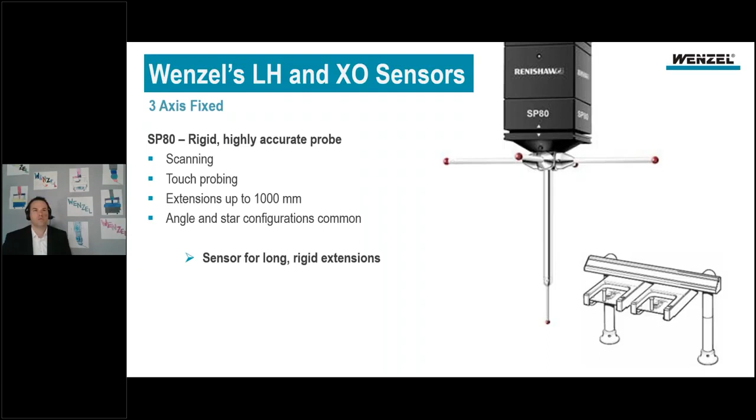So moving from a 3-axis fixed, we'll move into a 3-axis articulated probe. Articulation means we're still using the 3-axis of the machine to do the measurement. However, with a 3-axis articulated probe, you can now move the probe into different angles and positions. This eliminates the need for complicated configurations like star probes, crank probes, and allows more flexibility for the programmer to choose the angles they need.

This 3-axis articulated probe comes in two flavors, the PH10T and the PH10M. The PH10T is the most basic. It's for touch only, and you need to use manual threaded-in extensions. Where this would be appropriate is in an environment where you have very little changeover in parts, where maybe the parts are very simple, or where cost is of utmost importance for the customer.

Moving to the PH10M, M stands for multi-wire. This is essentially the most ubiquitous probe in the world. It allows you to use touch probes, physical scanning probes, and offers a wide range of compatibility with optical and laser sensors. Because the PH10M is truly ubiquitous, and it is in almost every manufacturing shop in the globe, if you're a third-party manufacturer, you develop your sensor to fit on a PH10M. It could be a Nikon, it could be a Kreon, it could be something else out there. Anything in the world, you're going to design it to probably be compatible with a PH10M. That gives you a lot of flexibility as a customer.

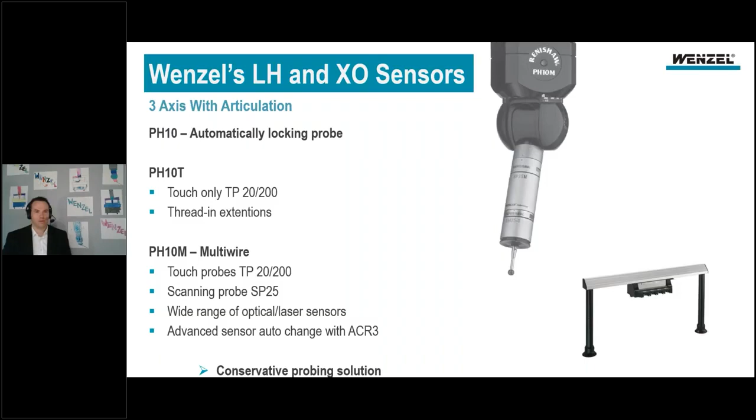So moving from our 3-axis, as we continue to get more and more flexible, now we're going to move into 5-axis touch probe. Where 3-axis was the machine doing the measurement, now we're using the machine and the probe together to do the measurement, which is 5-axis, two on the head and three in the machine. This is the PH20 touch system. This allows the machine and the probe to work together to take measurements in a very high-speed fashion.

I can talk a lot about this, but it's kind of hard to describe how quick and how much 5-axis changes this situation. So I'm going to play a quick video for you.

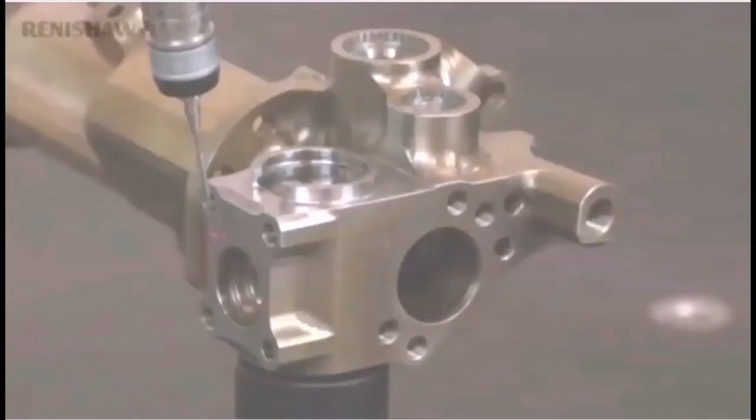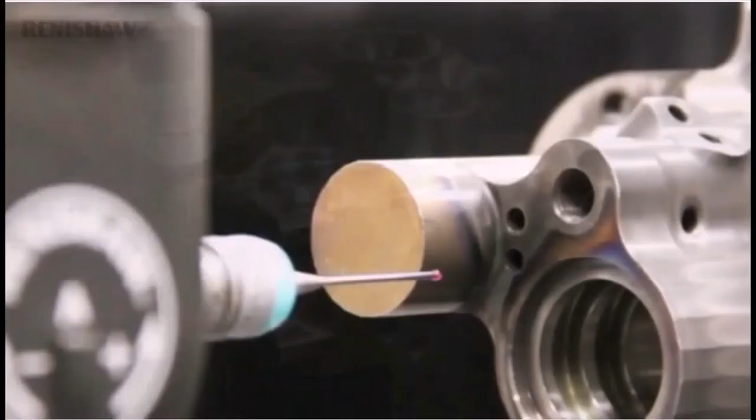As you can see, the probe head is positioned by the CMM and then it's taking measurements on its own. It truly is an incredibly fast solution.

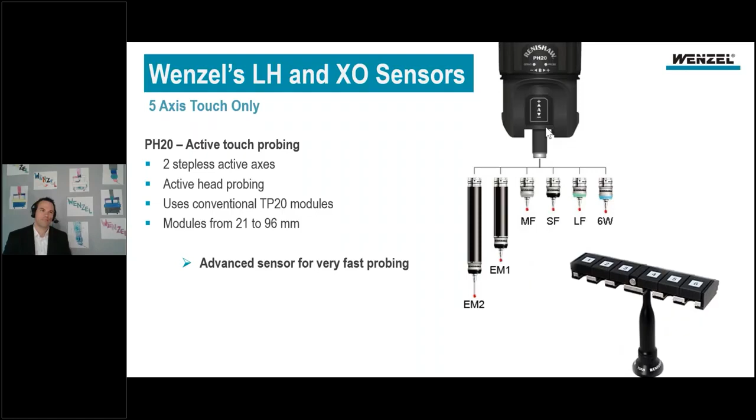So if we take all of these probing technologies and combine them together, that's where we're going to lean into the REVO system. The REVO system is a truly revolutionary sensor system that our CMMs are built and designed to carry. It not only has long styli, it not only has multi-sensor, but it's also 5-axis movement. It's also 20 times faster than a traditional CMM.

Traditional CMMs of whatever brand use a scanning probe that has a maximum scanning rate of about 25 millimeters a second. The Renishaw REVO can scan 500 millimeters a second. Now, I've talked to application engineers, I've talked to competitors, I've talked to customers. This isn't just a marketing blurb. It truly does run at that speed, and some people say it's even better when it's running faster.

Now, the REVO is the most expensive solution I've provided to you so far. However, it's completely revolutionary, and it changes the way we have to think about CMM measurement. With it being a multi-sensor technology, you not only have the incredible high-speed scanning, and high-speed movement for touch.

But now you can add a surface roughness probe. You can add a 2D optical probe. You can add a 3D optical probe. So you're taking all of these setups that are traditionally placed around the quality lab. You may have a setup for surface finish and have a person there. You may have handwritten reports. We're taking all of that and we're bringing it onto the CMM.

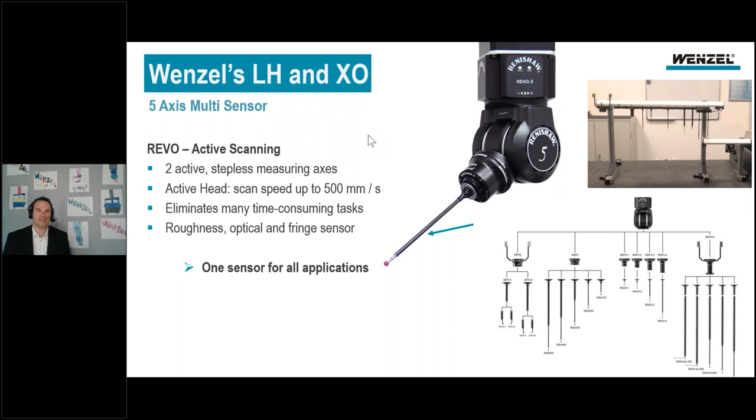So you've eliminated multiple setups. Now, traditionally, using conservative probing, a CMM is a bottleneck in the lab. It's not fast enough to keep up with the rest of the process. Now that we can run 20 times faster, we've eliminated that bottleneck and got efficiency of economies of scale by moving all of those setups onto the CMM. So now we have only one piece of equipment to maintain, one piece of software to maintain and learn, one knowledge base that we need to teach, eliminating all the rest of that complication. So it truly is a different way to think about how a CMM can be incorporated into a quality system.

So now that we know a little bit about the technology that can go on the CMM, let's talk about how the LH and the XO are from the same family.

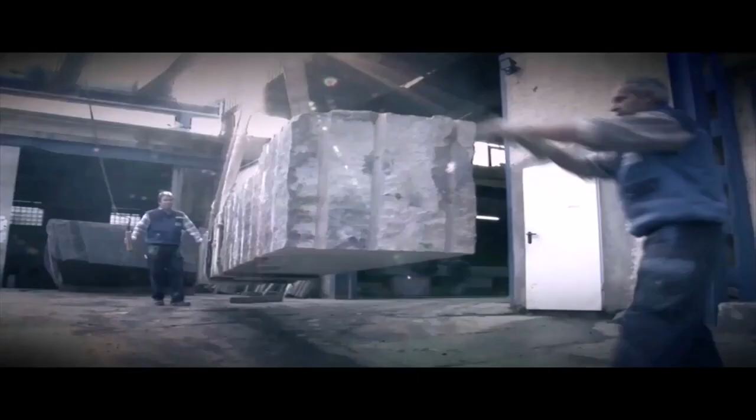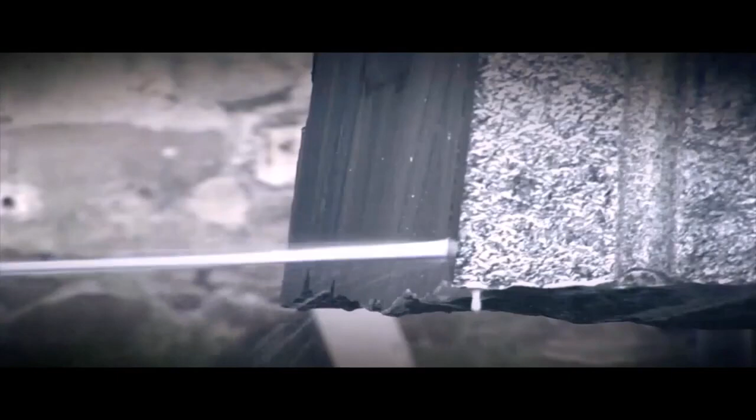You can see just how massive those blocks are. And then the hand finishing.

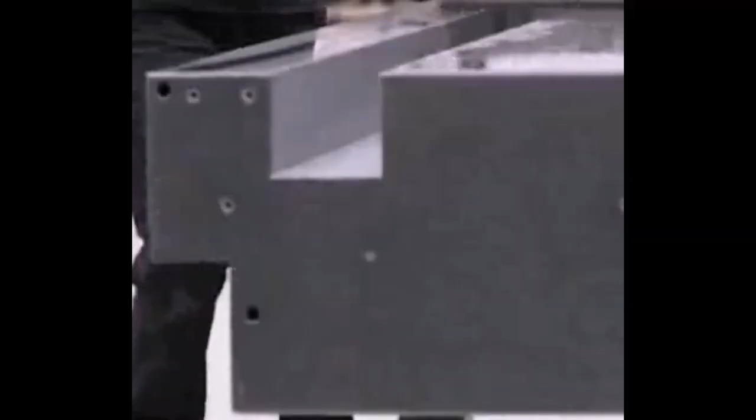I'm going to pause the video here. This is showing one block of granite that has been machined to fit the bearing cage of the CMM, so it's all one piece. I'll keep playing this, but it's important for the next slide.

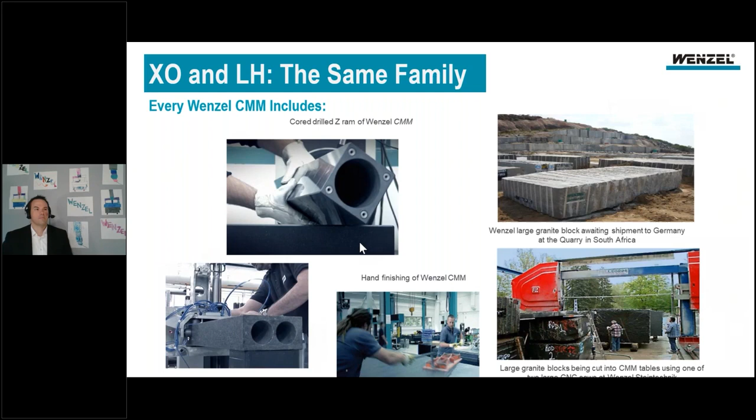That leads into the three points on why this is important: long-term stability, maximum mechanical precision, and they build into a low cost of ownership on every machine we sell. Long-term stability - well, granite is millions of years old.

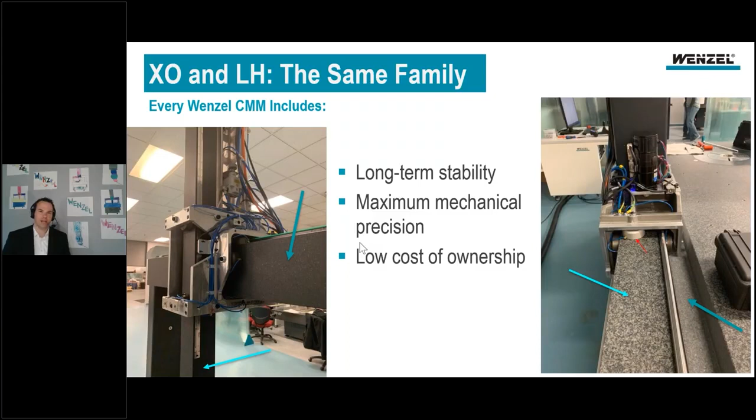So now that we know how the LH and the XO are from the same family, let's talk about the LH. When I was trying to come up with two words to describe the machine, I came up with flexibly advanced. Flexibly because the machine is built around you, and advanced because it is the epitome of technology. All of that research and development is going into sensors and better technology for these CMMs. You can take any advanced sensor that you can imagine in the industry and put it on an LH.

So let's start with a brief introduction to the bridge type LH machines. The bridge type LH machine can take every probe that I talked about earlier in the slide, the REVO, the PH20, the SP80, PH10, PH10T. It can also handle all of those third-party laser and optical sensors. It has a wide range of sizes, anywhere from 600 millimeters wide to 1500 millimeters wide.

And look at those accuracy specs: sub-micron levels of accuracy on the 600 and 800 millimeter machines, 1 micron accuracy on the meter machine, below 2 microns on a 1200. Very tight tolerances on these machines. Also, not only are the machines flexible in how wide they are, but every one of these machines can be built to your size of parts in length.

So if you have a 600 millimeter wide machine, you can get that in 6 meters long, or anywhere in between. And that goes for all of these. That allows that machine to be built specifically and tailored around you.

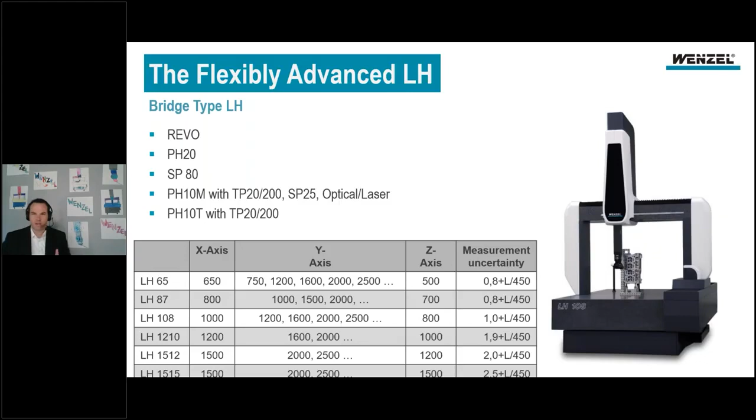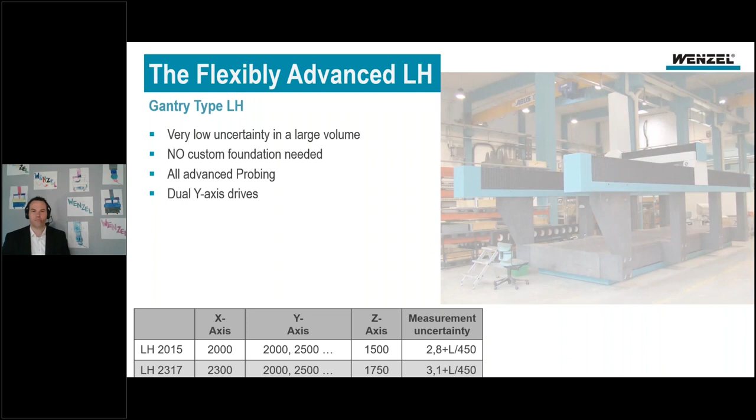For that, we have the LH gantry style machine. The gantry style machine takes all the drive components and bearing components that are typically down low by the operator and moves them up to the top of the machine. This allows the machine to maintain a very high accuracy, even though we're talking about a 2 meter, 2000 millimeter, or 2300 millimeter wide machine. Incredibly high accuracy with these machines for that size.

Also, there's still a standard machine. These do not need a separate foundation. Any industrial concrete floor that you have, these machines can be set in, just like a normal bridge type CMM.

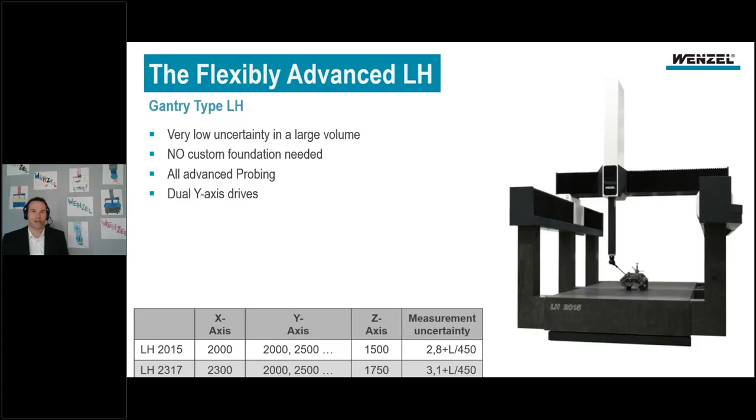Sometimes though, 2300 millimeters is still not quite big enough. So that's where we move on to the portal type or LHF type CMMs that we sell. These allow great part access. They're still riding on Granite guideways, and they're allowing you to measure parts 2500 millimeters wide, 3000 millimeters wide, 4000, 4 meters wide, and any length that you can think of. Do you need something that's 3 meters long or 12 meters long? We'll make it to size, the size that fits your parts. These machines are fantastic at measuring large engine components, train engines, train parts, tanks, large automotive production or truck production.

And the interesting thing about this entire LH family is that all of these can take the most advanced probing system in the world. So a very common configuration for an LHF, a very large machine, is to combine it with a REVO, because again, you're getting that 20 times faster speed, but also incredibly long styli, which are important in these large applications. And time is money. All of these machines again are built on a Granite base. Even this one, those Granite guideways, even if you had it 20 meters long, are all made of Granite, and the bearings are riding on Granite. So it's all in the same family.

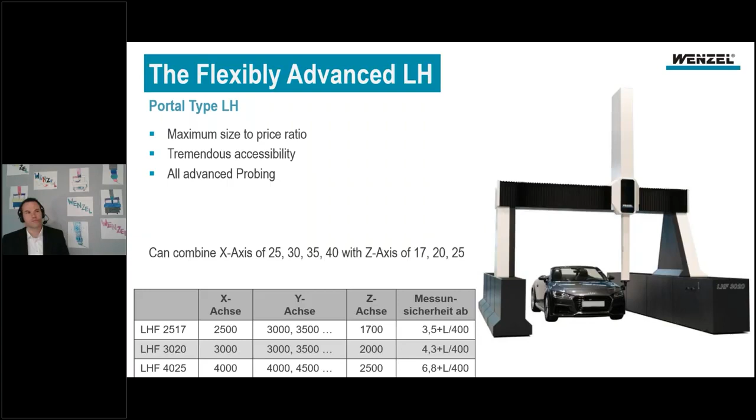So why is that? What does this do for us? Why is this important? What does this LH family all mean? Well, first off, it's designed for revolutionary sensors. These machines are designed to take anything a manufacturer can dream up, any advanced technology, and incorporate that in. By having the machine physically the best accuracy possible, it allows anything you can think of to be attached to the machine.

Secondly, customer specific configurations. Machines are truly built around you. They're built to suit what you need from the machine. You combine those two together and you get what I call a contemporary solution, a truly contemporary solution. All of that R&D money.

These machines are built for Industry 4.0. These machines are built for high advanced technical parts. These are not built for parts today, these machines are built for parts tomorrow. There's plenty of applications out there that don't quite need submicron accuracy levels yet. But if you buy a Wenzel LH at a submicron level today, and you run into those parts 5 years from now, you still have a solution that's ready to meet your challenges.

The Wenzel LH is a machine where you stake, you put your flag in the ground, and you accentuate your quality process. You're trying to show that off. You're telling your customers, I make the most advanced parts in the world, and I'm going to win your business.

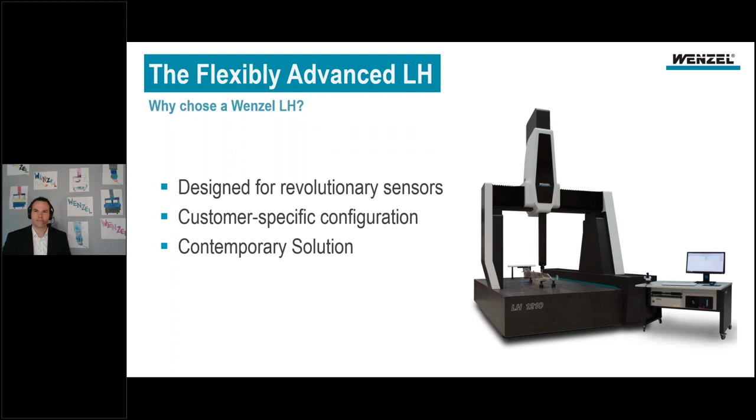So if we take all that from the LH, not every customer, not every part demands that amount of flexibility. Not every customer or part demands the most advanced technology. There are millions of manufacturers all over the globe that make just standard parts that make the world go round, that we don't even think about. It could be something in this headset. And for that, we took everything that's important about the LH, all the advanced research and development, and distilled it down. We took the most essential components, combined it all together, and created the XO.

So for the XO, I chose the two words sensibly robust. Sensibly, because it is the most distilled and essential version to measure your parts on. And robust, because it's still built on that same family values. It's still that long life material, it's still the same quality process. So it's going to last a lifetime.

So how do we take an LH, which is advanced and infinitely customizable, and distill it down? Well, one way we can do that is to limit the amount of sensors, or build the machine around the most common sensors in the industry.

The PH10 is absolutely ubiquitous, it's the most common sensor in the world. And the PH20 has been incredibly popular in the essentials kind of business. By limiting it to the most common sensors, it allows us to boil down and distill that LH into something that's more affordable.

But it still gives you the PH10M with touch and scanning. It still gives you all of the third-party support for all of those optical and laser sensors out there. It still gives you that advanced 5-axis technology. So you're not giving up things, you're just focusing on what's truly important for this particular situation.

This is truly an essential solution for standard tasks. Another way we distill the LH down is by limiting the size. Where the LH is infinitely customizable, the XO has some standard sizes, anywhere from 500 to 1,000 millimeters wide, and lengths up to 2 meters. So you can't get a 6-meter XO.

But, again, going back to that same family, look at those accuracy specs: 1.8 microns for a meter-wide machine, 1.5 microns for a 500 millimeter machine. These are not economy machines, that's why I use the word essential. They're really a premium machine that has all of the essential needs for a customer, not giving up by choosing an XO.

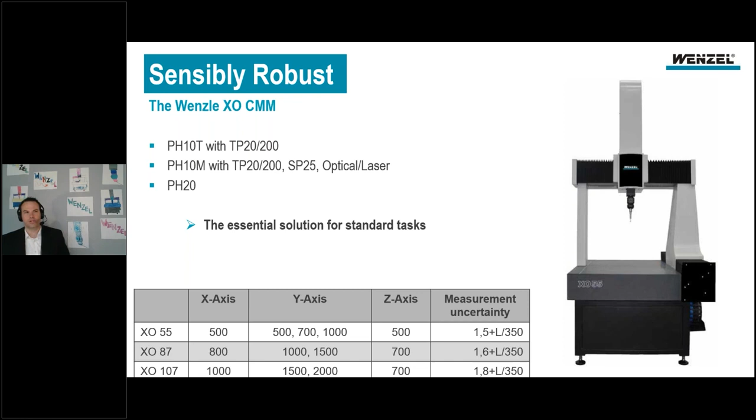So why are these important? What makes the XO special? Maximizing price to performance. Because this is distilled down, because this is the most essential things, it gives you that economy-like price for a very premium, high performance product. So you're maximizing your investment for your price to performance ratio.

Next, it's going to be a more compact solution. Because it doesn't need to be designed to fit anything somebody can imagine, the machine can be smaller, tighter, shorter. Now when we talk about this, what comes to mind for me is small locations. If you have a small shop or something like that, but it's just scratching the surface.

Having a more compact design, there was a customer that has 40 of these in one location, and this customer could have bought 40 LHs or 40 of whatever. The money wasn't the problem, it was space. They had a given amount of volume in this shop, so they chose the XO over the LH just because it fit 40 of them very close together. So it can mean a lot of different things, but it's a very compact kind of design.

And if the LH is a contemporary future solution, then the XO is a foundational solution. With the LH, you're staking your flag and saying, Mr. Customer, I make the most advanced parts in the world, and I'm going to win your business. With this, it's something to build a quality process around. It's telling your customer, I take quality seriously, and I make your parts well. I make some of the best parts in the industry, but I want the most efficient solution.

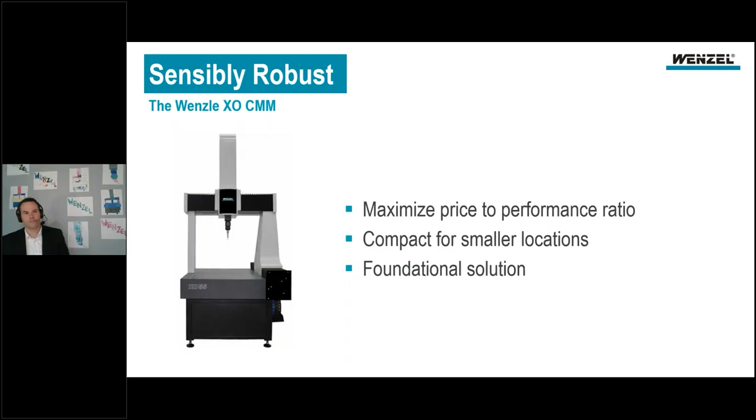So where that leads us is the end. And we ask ourselves the question, what system is right for you?

As a salesperson, I often hear that a salesperson's job is to sell things, doesn't matter what it is. And that's actually not true, that's a very old way of thinking about it. As a salesperson, our job is to educate, our job is to make information available. You're all very smart, everyone in the world, we all have the internet, we all can do our research. The job of the salesperson is to provide you with the right information to help you make the best choice, even if that choice may not be a product I have today.

So I'm hoping with this presentation, I've given you some information. I've given you enough to be dangerous to make a better decision, and I hope that you learned something today. So ask yourself, and ask me in the comments, ask me in the chat, what system is right for you?